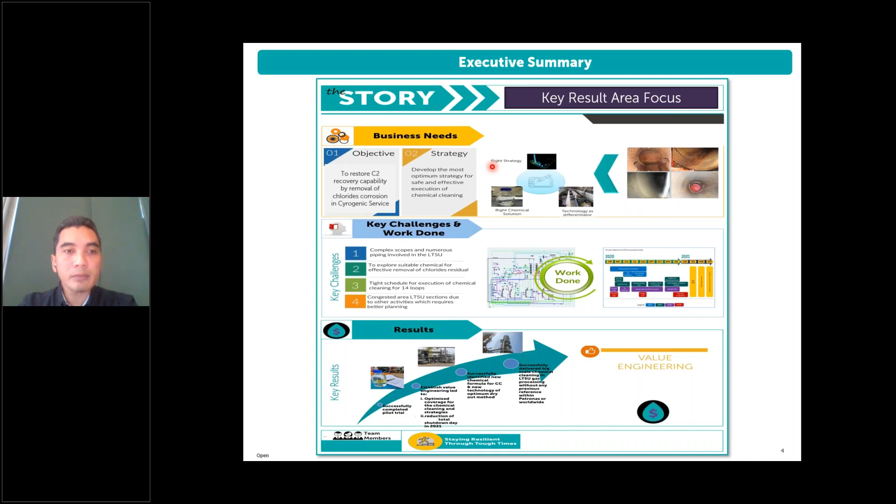So we managed, Alhamdulillah, to restore back the capacity of the plant itself by cleaning the corroded piping and addressing the limitation of the piping, which ties back to our original objective, which is restoration of the integrity of the equipment itself. That's the high-level summary of the method I'd like to share today.

Now we start with a little bit about the background. What I can share with you is that after several times operating the plant, we found that after 2018, the production of our sales gas as well as our main product started to degrade. So there is something limiting our production.

If you look here, after 2018, the production started to cap or was limited at 70%. So something was limiting our plant. During that time we started to establish the root cause, and then we found that the contribution was because of chloride corrosion.

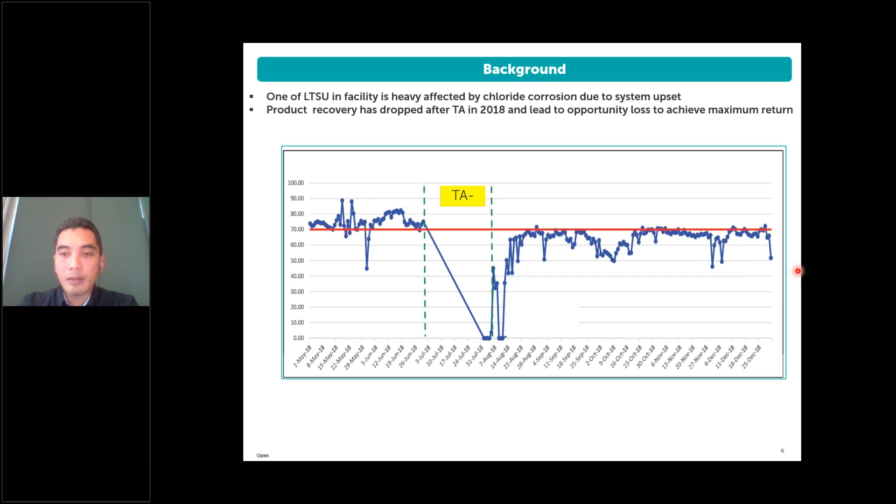We took some samples and did some analysis. Basically what we found is mostly chloride. What we conclude from here is that moving forward, we have to find a way to remove chloride entirely, and after that ensure there is no more chloride that can attack our plant anymore.

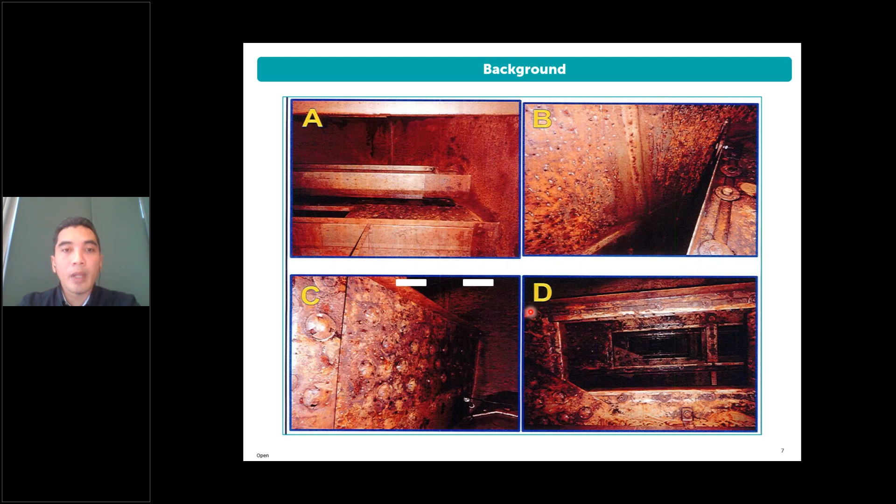What I can summarize from our root cause analysis: chloride corrosion will only happen if the condition is above 0 degrees with a very high concentration of chloride as well as free water. That means even though we have chloride present, if we don't have free water, it won't happen. So what we concluded during that time is that what basically attacked our system is hydrochloric acid, HCl - that's our main root cause.

We also did some reference checks against API Recommended Practice 571. They mention that for carbon steel - especially since some of our piping is carbon steel - you start to have the impact of chloride corrosion if you have pH concentration below 4.5. That's what we found during our root cause analysis.

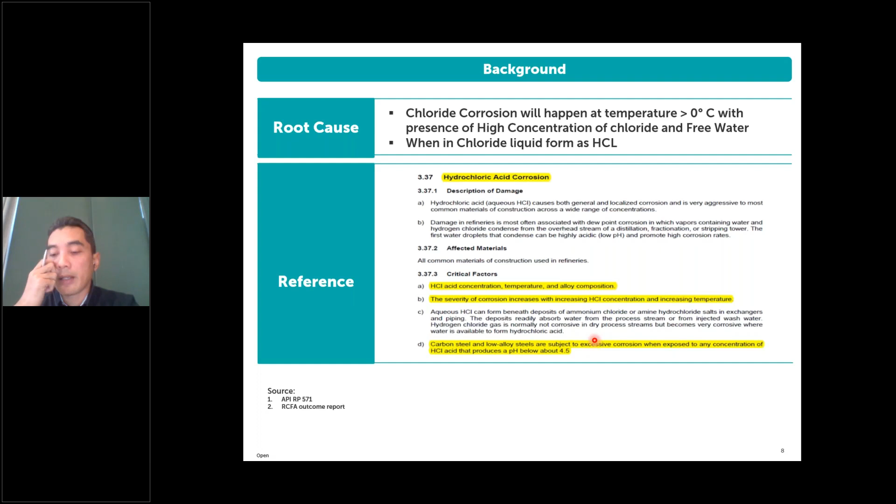That's more on what we found and what we established as the root cause attacking our equipment integrity - the one we established before we decided to proceed with the chemical cleaning method.

All right, then we go with the objective and scope of work. The objective, as I mentioned earlier, is that we have to restore back our production - that's the main objective. But what I want to share here is the scope of work.

I think this is something I would like to share with everybody, because from this slide what I want to express is that we had very good teamwork among internal PETRONAS divisions as well as our external partners. This kind of problem or issue had never occurred in PETRONAS since day one - this was the first time we had this kind of issue in the cryogenic system.

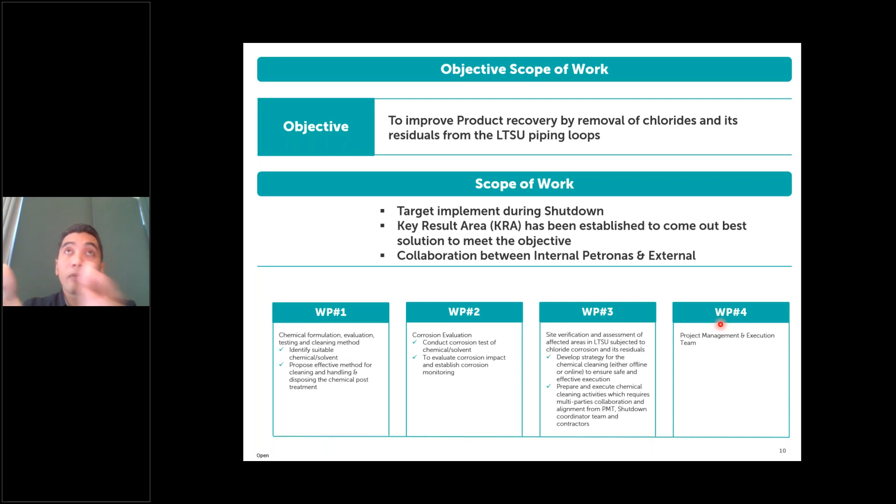All in all, what we established during that time was that every single group had to look after each scope. We established 4 scopes. Why 4 scopes? Because from the strategy, we had to have a dedicated team to look after engineering, look after execution, and look after chemical selection. Those scopes and methods - we had to establish a team for each one.

At the end of the day, all of them reported to one leader, which we call the KRA - led by myself. So we go with group number 1, WP stands for work package number 1. For the first group, they had to find the best chemical solution, then find a method to evaluate that chemical, and last but not least, propose how we could execute that chemical cleaning itself. That's the scope for group number 1.

For group number 2, of course, using the chemical, we have to anticipate the corrosion impact.

We have to anticipate the microstructure impact. So how can we evaluate that? How can we establish the criteria for how much corrosion or loss of thickness we allow? Because even though we are doing the chemical cleaning, we have to ensure the thickness loss or corrosion allowance stays within our allowable limit.

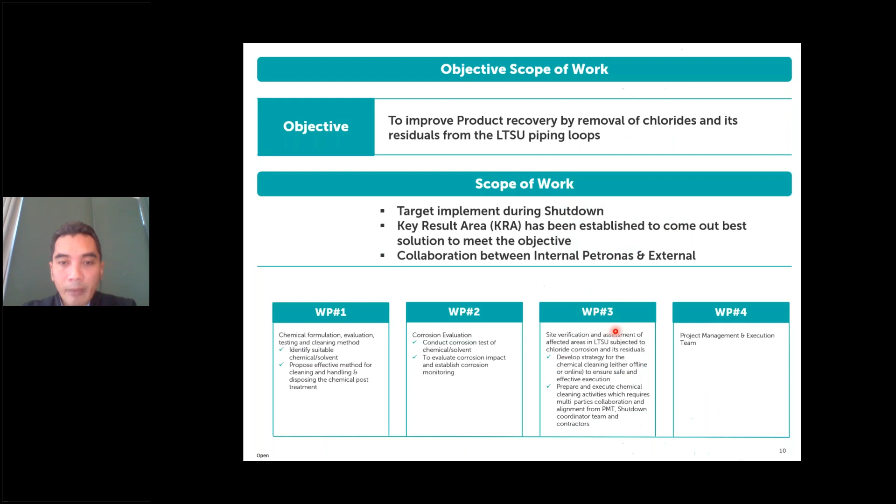So that's the scope of work that I would like to share with your team. Okay, we go with the method after we establish the scope of work and how we execute.

Okay, in a simpler way, we can divide the methodology into 4 main steps. The first one, as I told you before, is we have to understand the scope, and then we have to understand the approach that we choose.

First, before you solve the problem, you must understand the problem. You cannot, using the normal mechanism or normal approach, totally solve the problem if you don't understand the problem, or you don't understand what is the contributor to that problem. That's the most important thing.

Okay, and then how can we, technically or theoretically, ensure or have high confidence that our proposal or our method is right? So how we do that is basically we are doing simulation. From that simulation, theoretically, we show our management, okay, this is the best method based on the simulation. Then by then we can start to imagine how it behaves in a practical way.

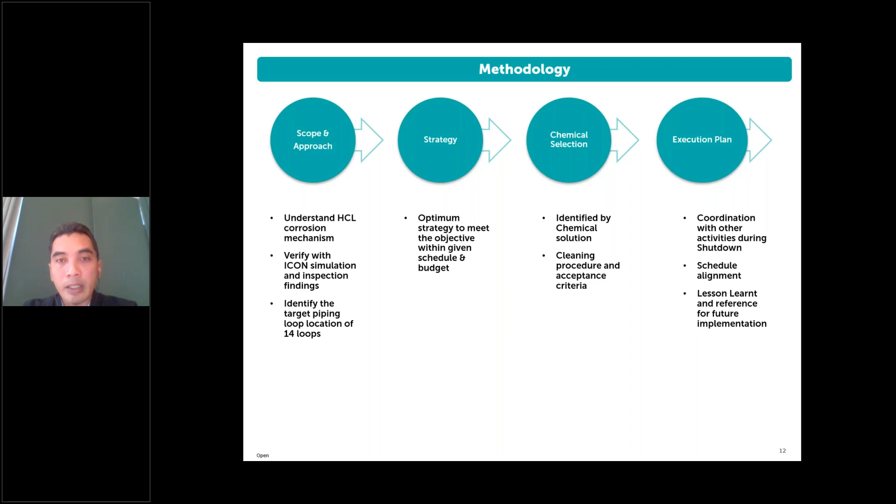Okay, that one is more on the methodology. I think we can have further discussion or detail if anyone would like to know more about the technical methodology itself. Okay, let's go with the result findings.

This is more on the milestones and key activities that we executed last time. If you look here, we spent about 1.5 years from the study until the execution itself. We started in 2020, and during that time it was MCO time, so it was quite another challenge for us.

We started with the study, and then we managed to finish the chemical selection around Q1 of 2021. Last but not least, the first execution and the bigger scope execution was completed in August 2021. All in all, after completion, it's about 1.5 years.

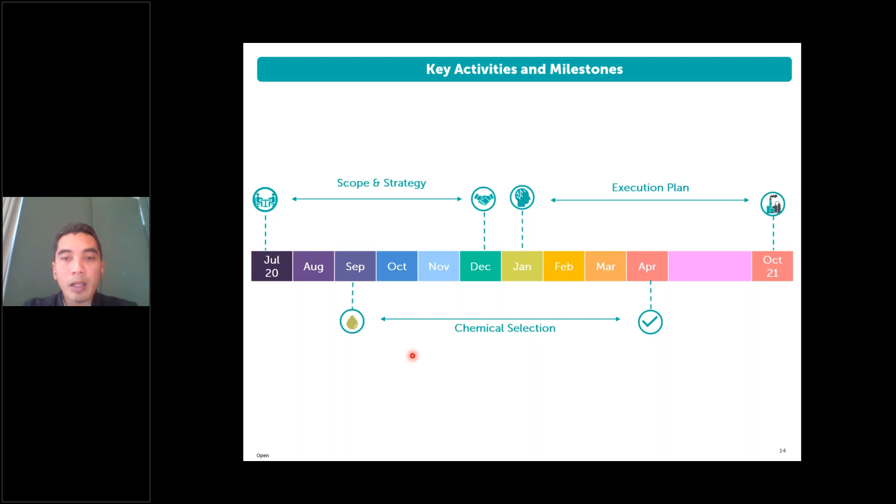Now let's go a little bit into the high level method and scope itself. As I told you before, we have 14 loops or 14 scopes that we have to carry out. How do we establish that scope itself?

First, during normal operation, we observe and establish checking in terms of high differential pressure across some equipment. That's number one, because under normal operating pressure, you don't anticipate any high differential pressure. So if high differential pressure starts to hit the alarm, something wrong has happened. That's criteria number one that we establish.

During previous maintenance or shutdown, we also open certain equipment. That's when we start to establish which equipment is having corrosion or reliability defects. From the inspection we get an inspection report, because for every single thing we can check in terms of thickness, what happened to the thickness.

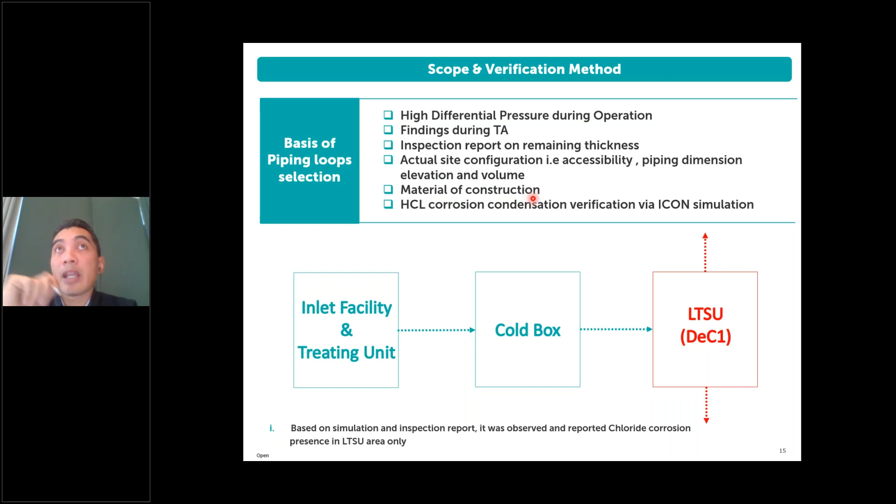Let's touch a little on the material of construction. Why do I say that? Because carbon steel, low temperature carbon steel, or stainless steel each must use a different chemical. We cannot use the same chemical because each material has its own individual compatibility with each chemical. That's why we have to differentiate based on the material of construction itself.

This is more on the area we are focusing on. If you look here, the one in the red box is the impacted area I explained earlier, the cryogenic system. Why are we talking about the cryogenic system? Because this area has some corrosion impact, corrosion from chloride itself. Other than this area, we didn't observe any impacted equipment reliability issue. It's only this area.

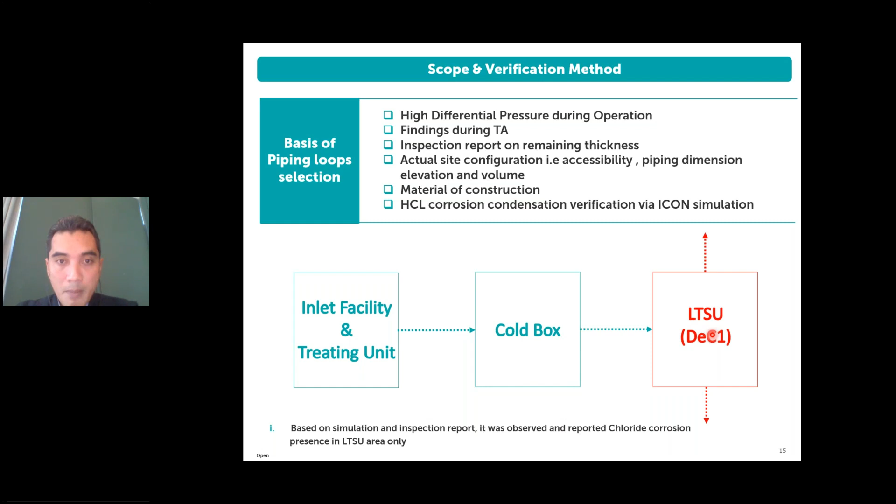All right, now we go a little bit deeper. This is the overview I'd like to share with the audience here. This is the area and system where we carry out the chemical cleaning itself. Let me try to differentiate it.

So why do we establish this overview? Because we have to ensure we do the cleaning in the right area. We don't want to spend effort on the entire area doing chemical cleaning, because why do unnecessary scope? We just need to do the rectification where needed, or fit for purpose only. That's the message here.

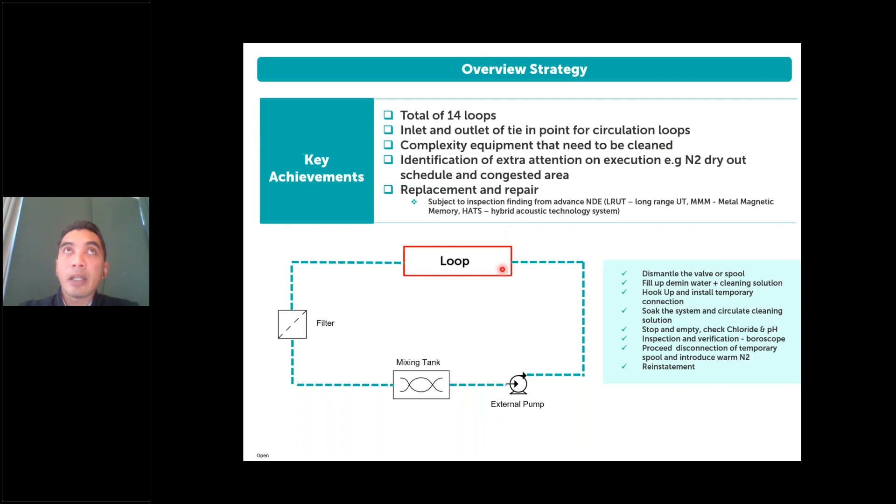All right, I think this is the high level how we execute the chemical cleaning itself. Right, as I told you earlier in the first slide...

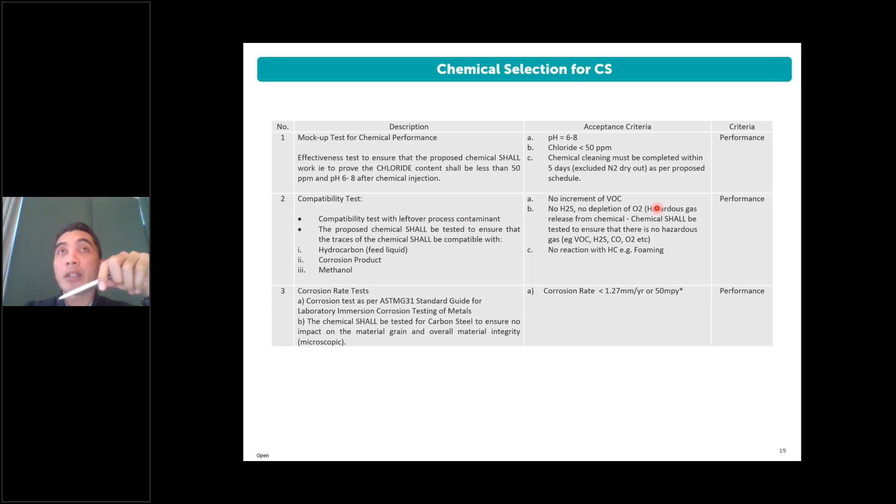Number two is in terms of compatibility. Why I say compatibility is more to limit back and reflect the safety requirement - we have to ensure the chemical we choose has no VOC. What is VOC? Volatile organic compound. So this kind of VOC we cannot allow. If any chemical we choose is found to have a VOC, we will consider that one not qualified. So that's number one.

Number two, we also need to ensure there is no side reaction - no H2S release, no carbon monoxide, and no depletion of oxygen itself, because we cannot allow this kind of situation to happen during the execution. So this one is more on the safety and performance.

Last not least, the chemical chosen must ensure it doesn't have any compatibility issue or side reaction with traces of our product or any hydrocarbon in our system, because we worry that later, after start-up again, we will end up with an additional problem or new problem - for example, a foaming problem.

So this kind of thing, we have to ensure the one that we choose must be friendly or compatible with our system. Otherwise, we will solve one problem and end up with a new problem. We don't want to have another problem. That's our intention for number two.

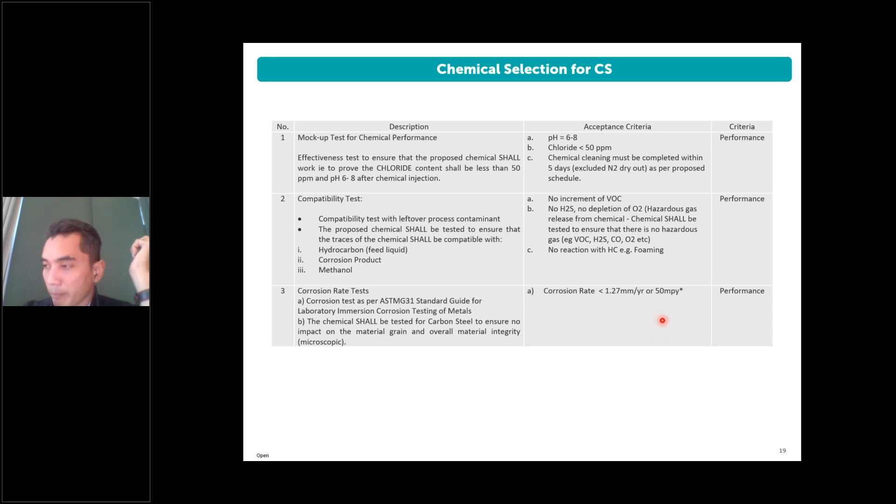As I said, it's very difficult to find the best chemical to fit for number 1, 2, 3, because at the end of the day you have to ensure the criteria itself is fit for purpose. That means the thickness itself, as long as it can last for our plant's remaining life, is good for us. That's intention number 3.

All right, this is how we do the chemical cleaning. We do the chemical cleaning, chemical selection for carbon steel, and then we go next to stainless steel. I think stainless steel is more straightforward because for carbon steel we don't have the reference earlier, so that's why it's a little more challenging. But for stainless steel it's quite straightforward.

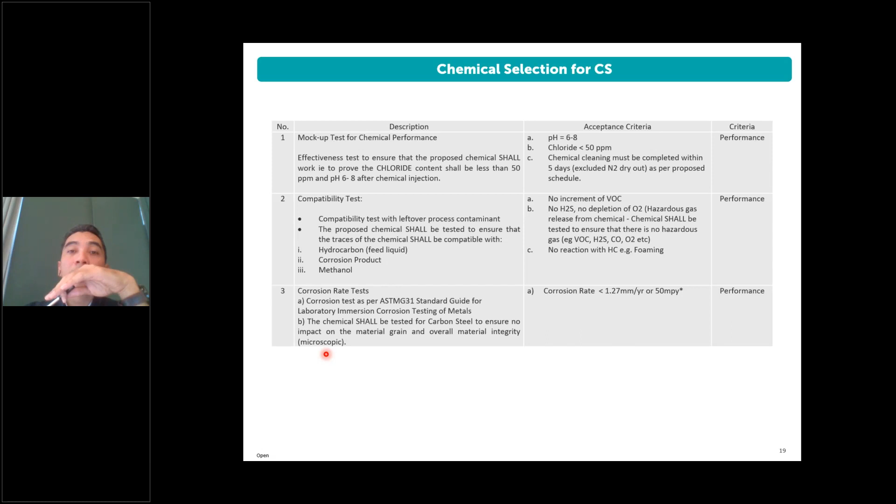We go with what's quite common, we call it nitric acid. Normally the community uses this kind of chemical for stainless steel. How we establish this is basically you can refer to ASTM G190. For stainless steel, it mentions the nitric acid but with a different concentration, and it also mentions the condition of the temperature itself.

However, the concentration they recommend, we didn't follow straight away. We did some readjustment based on our condition of the piping and equipment itself. We don't necessarily need to be so acidic, we don't need such a low pH. So that kind of arrangement we adjust internally. At the end of the day, we end up with a 5% concentration of nitric acid.

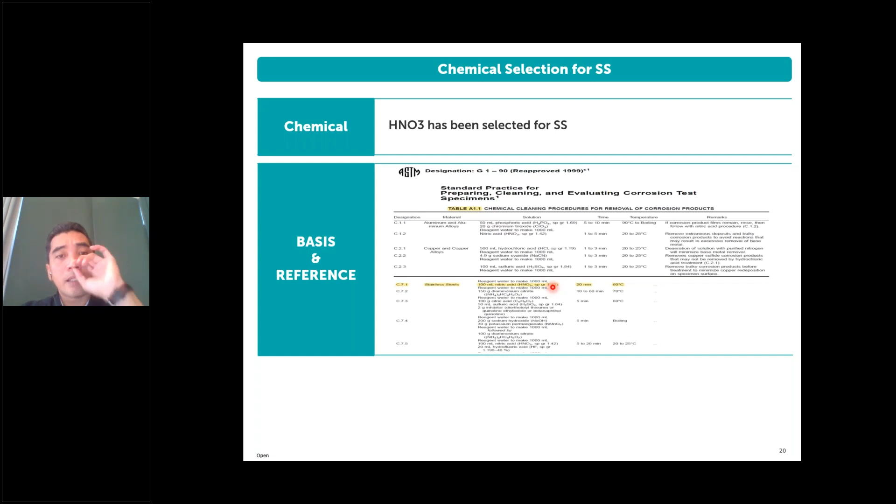So I think nitric acid is more straightforward because you can refer to international references such as ASTM G1-90. But for carbon steel, you have to do a very detailed comparison because at the end of the day, it's up to you how you want to achieve the criteria that you want.

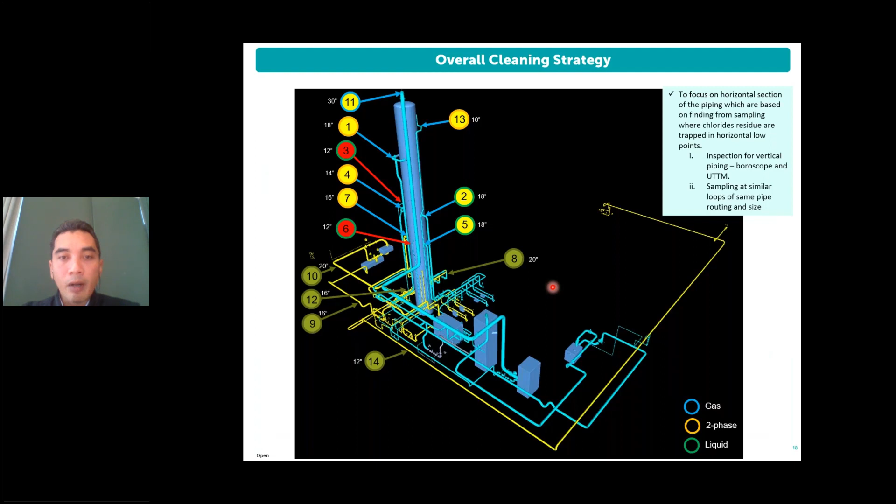All right, we already touched on the overview of 3D. We already touched on the chemical, and on the chemical for stainless steel. Then we move on to how we execute the job itself.

I already mentioned earlier, at a high level, the circulation itself, but let's go step by step. From time zero, starting here, to time 100, which is complete for chemical cleaning. For chemical cleaning, as I told you earlier, we need to establish the circulation itself.

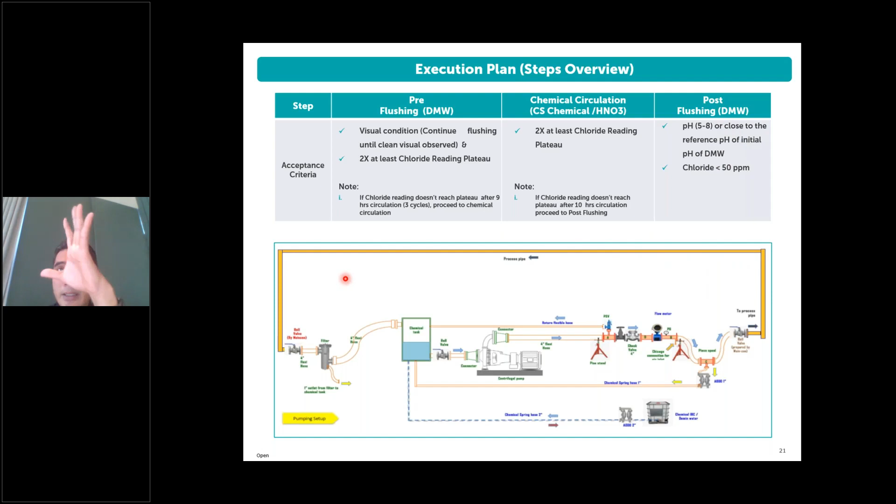Last but not least, after your chemical treatment is clear, you have to drain and flush it back to ensure all the chemical residue is removed - there should be no more chemical inside your equipment or piping. We establish this using another round of demin water, and we have to ensure the demin water quality matches the typical demin water introduced, which is around 5 to 8 pH rating.

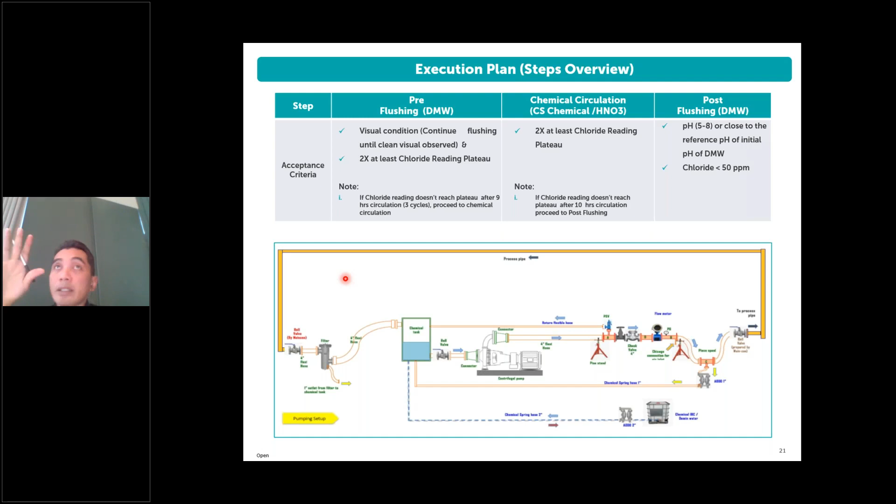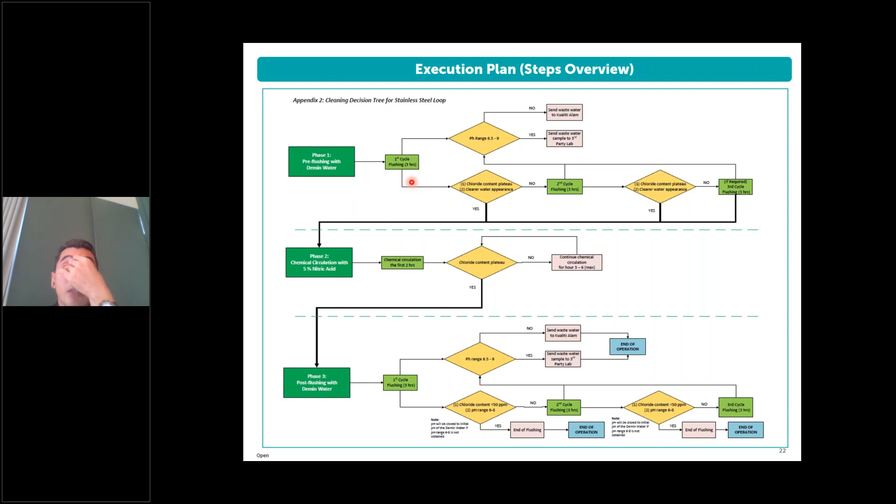Okay, that's a detail on the execution method. This one is more on the step by step. As I shared earlier, the previous slide is the one that I explained. If you cannot achieve the certain plateau, you have to revert back to the original method. What I just want to highlight here is for the last one.

The last one is more on safety and environment. After all, after we complete everything, all the waste, we put it in one location and we send it to Kualiti Alam, because at the end of the day we also have to take care of our environmental impact as well.

Okay, we go to next slide. All right.

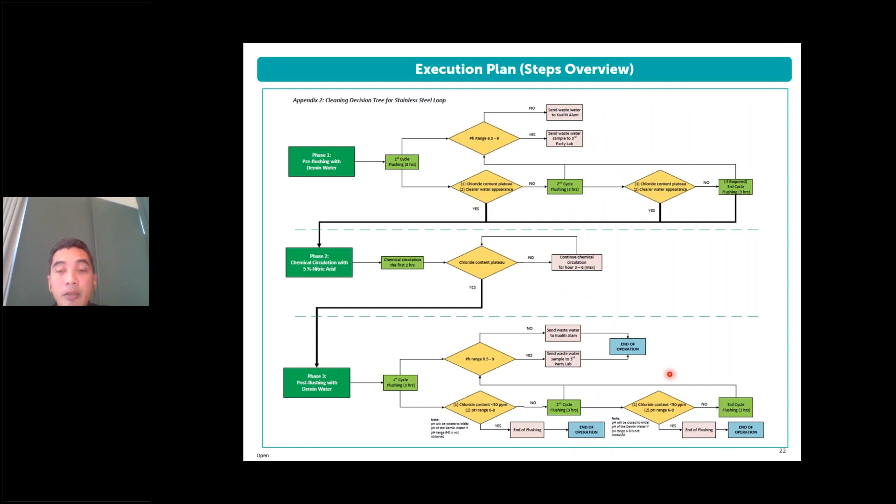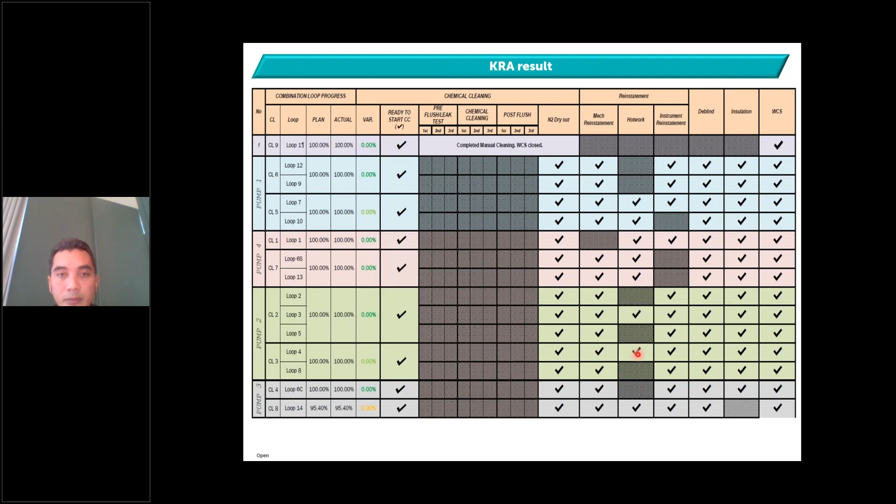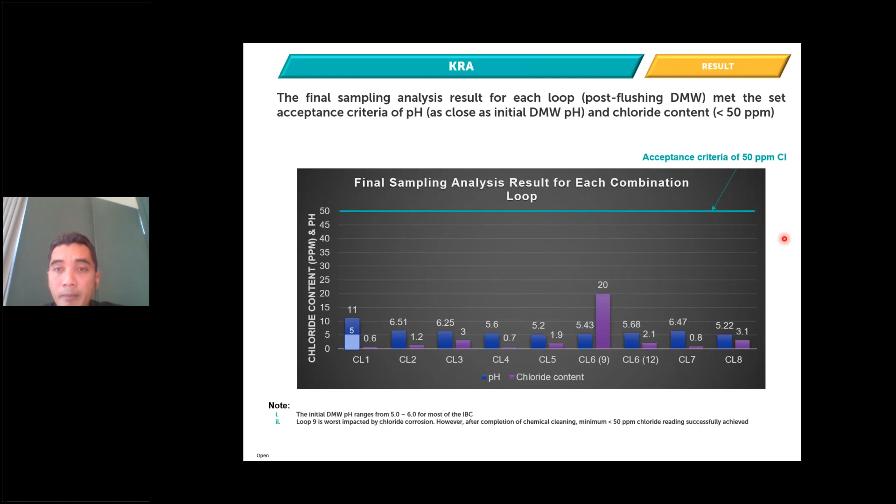And then after the chemical cleaning, as I told you, we have to remove all the chemical and all the water leftover inside the pipe. How we do that is basically we do the nitrogen dry out.

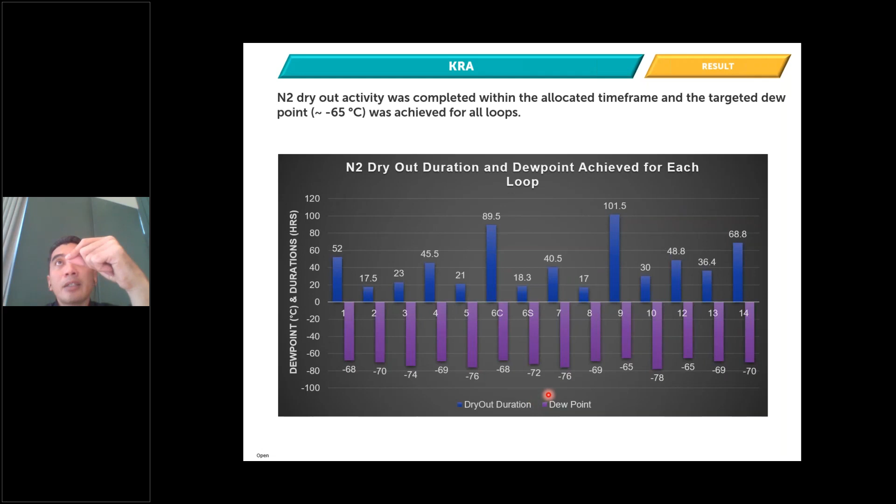How we ensure the nitrogen dry out achieves our target is by monitoring the dew point. What kind of dew point do we have to monitor? We have to ensure every dew point managed to achieve minus 65 degrees or below, even better. Why minus 65? Because of moisture concentration. In our system, we require a certain allowable moisture content, so that concentration of moisture content translates to temperature, which requires equivalent to a minimum of minus 65. That's how you should read this graph.

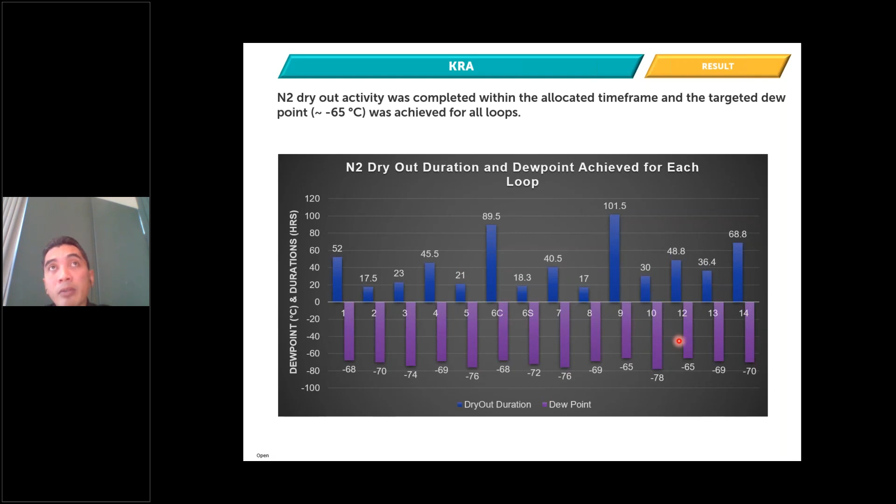And basically the blue one is more on the time taken. Maybe if anyone later asks why a certain loop took longer time, we can discuss that a little bit later during the question. But my intention here is that every single loop has its own time taken to achieve minus 65, but all in all we are able to manage to achieve it within the time frame.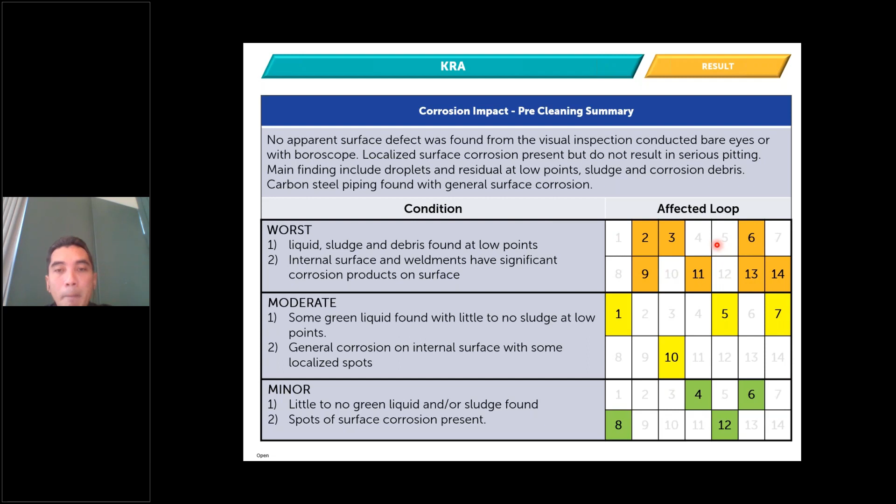The numbering itself is why we say worst. The orange one is loop 2, 3, 9, 11, 6, 13, and 14. How you should read these boxes - okay, we go to worst. I think the worst one is loop 11, and another one is loop 9.

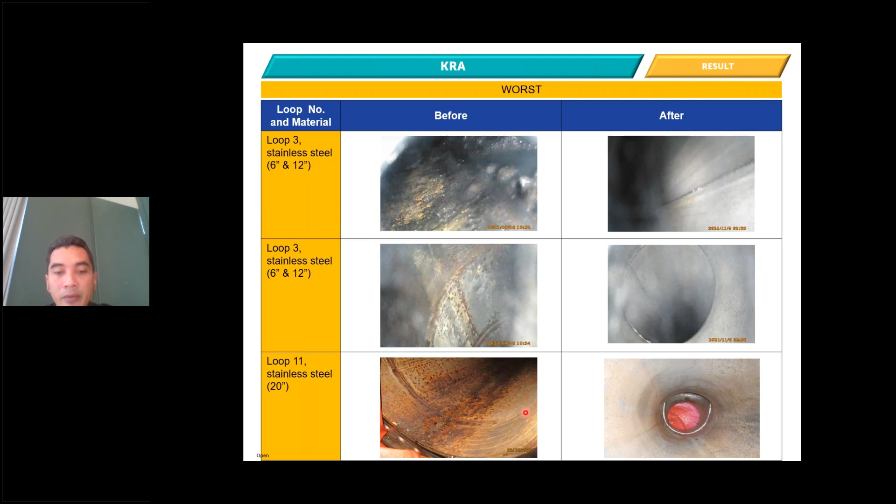If you look here, Loop 11 is badly corroded, and after the cleaning itself, if you look at the impact, it looks reverted to original condition, which means all the corrosion we managed to have complete removal of. And if you look at number 9, this one is very bad, and this is after our chemical cleaning, so it reverted to the original plan.

How can we manage to get this picture? I think during that time we had the boroscope camera, so we can access, I think, up to 10 meters from the first point of the cable of the boroscope itself. So that's the reason we can access very deep locations of the pipe itself.

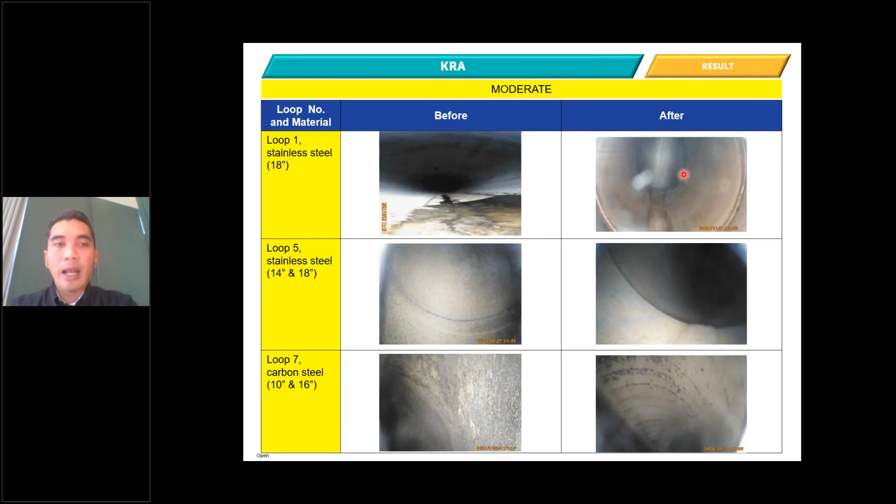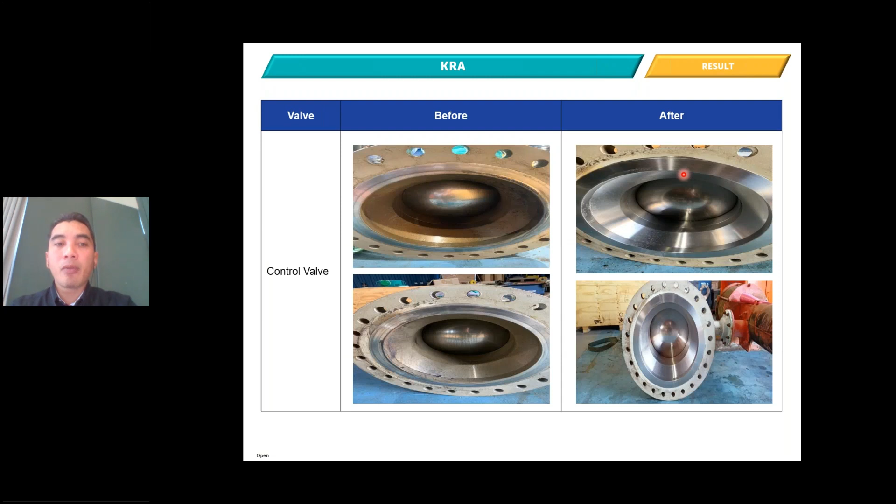I think this one is more moderate. I don't want to go through the moderate ones, I just want to focus on the worst one. Apart from the piping, we also did some cleaning on the control valve, and this one I told you is more focused on Loop 11.

In conclusion, the key message I would like to share with everybody is, as long as you have good collaboration and good teamwork, you can anticipate there is a light at the end of your tunnel. That's the key message here.

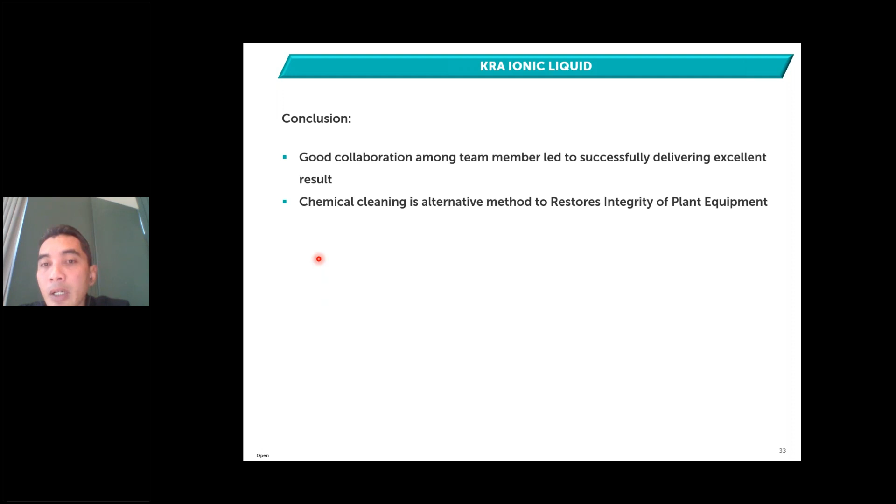And the last thing is about the chemical cleaning itself. We can consider this solution as part of the alternative way, rather than using the conventional restoration method to restore the integrity of the plant.

I think that's all from myself. After this we can have the detailed discussion in the question and answer session. Thank you very much, that's all from my side.

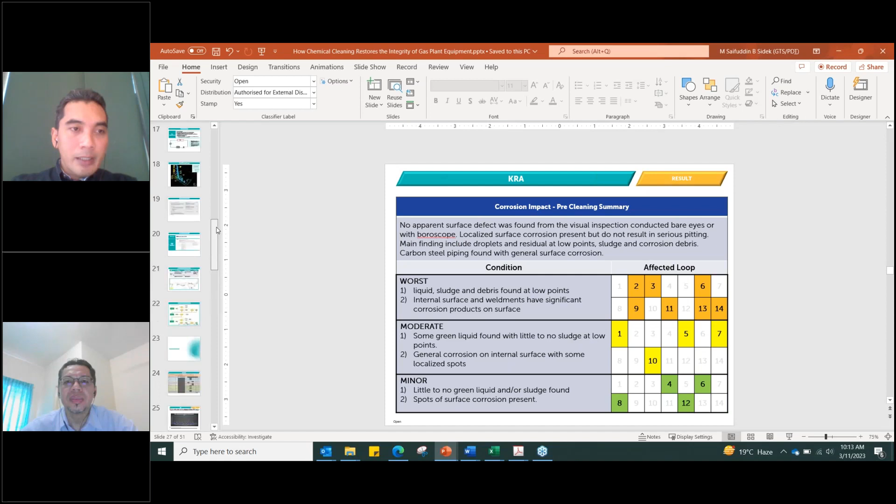Okay, thanks Encik Rafidi. I think this will revert back, there's more related to this slide again. But please let me know if you can see this slide or not. Yes, we can see. All right.

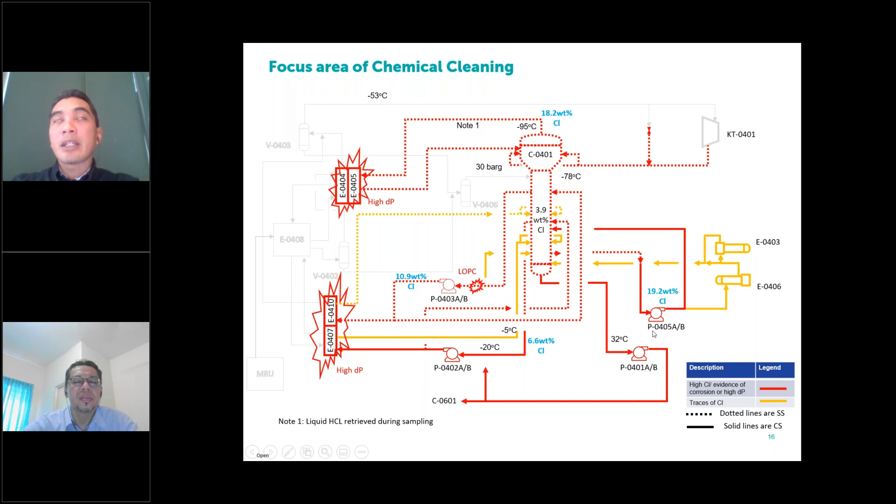I totally agree. If you are anticipating higher chloride concentration, you are anticipating a lower pH reading, and then you will start experiencing the worst condition of the piping itself. That's what I can conclude. What we anticipated is not exactly, but what we anticipated matches what we found during the real execution. Hope that answers your question.

Okay, thank you, I hope that answers the question from Cik Muhammad Nizam. Keep the questions coming, we still have some more time left. You can type your question in the chat box and I'll read it for the speaker to answer.

Okay, there's one new question coming in from Mr. Choi Jia Hong again: What is high DP? High DP is the high differential pressure. Right, maybe you want to explain further.

Basically, imagine high DP is, let's say the start point is P1 and the end point is P2. So P2 minus P1 becomes higher, that's the high differential pressure, because for every differential pressure we have our standard or normal number. Let's say the normal number is 0.5 bar, so somehow it's exceeding the normal number. Exceeding means it could go up to 3 bar, so something has happened, something wrong has happened. That's the kind of situation that triggers and keeps alarming us. So from the DP itself, we can start to give the signal or indication that something wrong has happened.